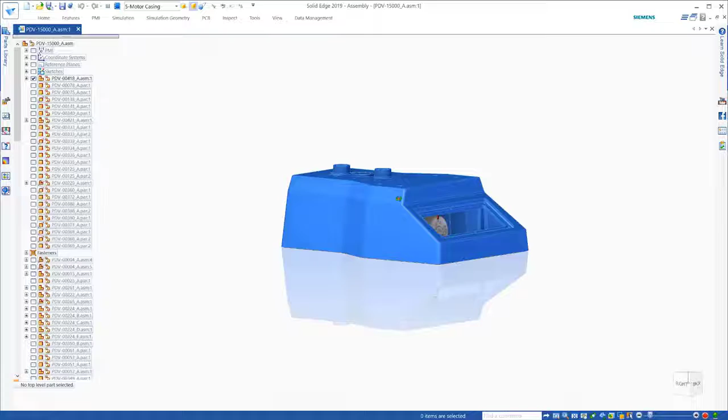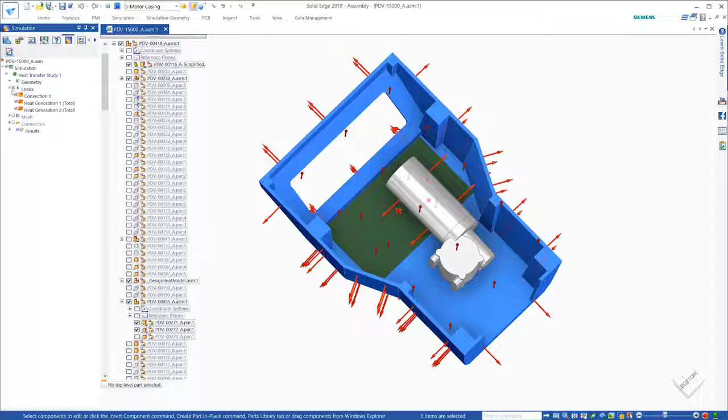Solid Edge expands its structural and flow simulation capabilities. Starting with structural simulation, in addition to static studies for stress strain, buckling, vibration, and steady-state heat transfer, users now have the ability to study the impacts of heat moving through parts with relation to time, also known as transient heat transfer. This allows designers to see temperature changes over time in order to assess things like heating and cooling performance.

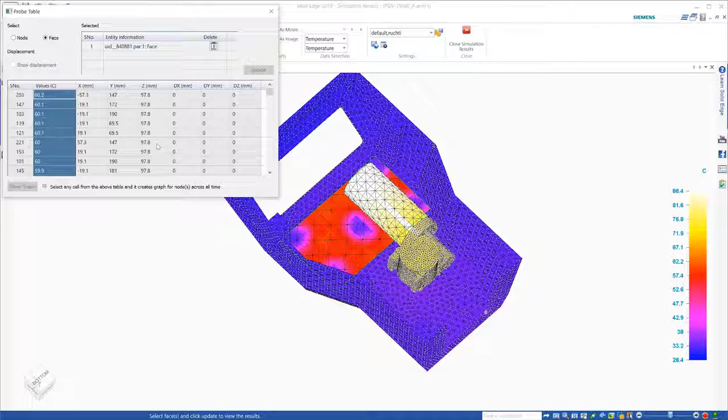In this example, we need to ensure that the heat generated from the motor doesn't overheat the printed circuit board, or PCB, located directly beneath it. A steady-state heat transfer has already been defined here, which takes into account the heat being generated by the PCB and the motor. Using the probe tool, we can query the temperature at different points on the board. Here, the new face probe option allows us to easily find the hottest regions.

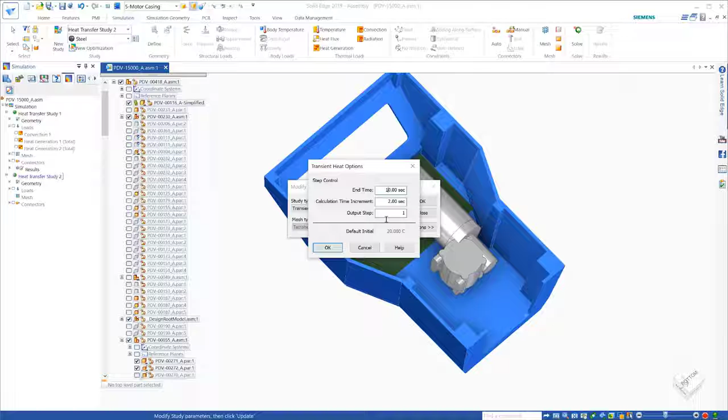What we're seeing here is the final steady-state result of heating parts until they have reached full capacity. However, for this assembly, the motor only works for a couple of minutes at a time. As such, to get a more realistic view of the heat on the PCB, we'll use transient heat transfer to accommodate for these working times. This is as easy as copying and pasting the existing study, changing the study type, and defining the working intervals. Then the study can be solved.

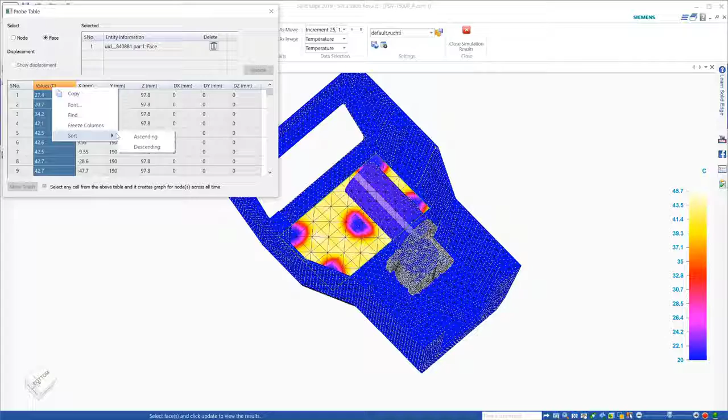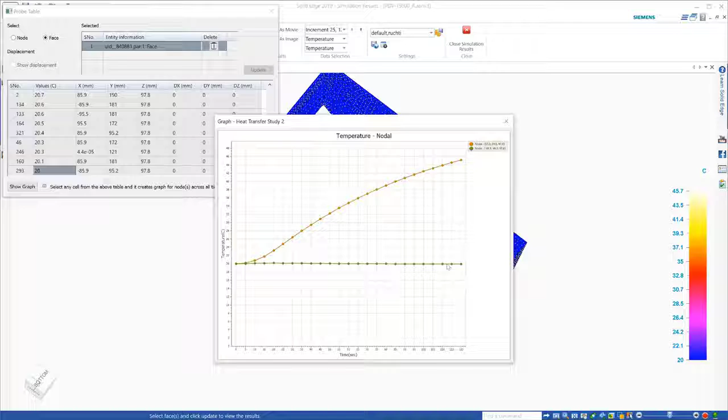Viewing the results, we can immediately see the difference in heat distribution of the assembly. As it's only working for 2 minutes, the motor doesn't have time to heat to full capacity, effectively having a negligible effect on the overall temperature of the PCB. The probe tool shows that the maximum temperature is 15 degrees cooler than the previous study. Additionally, selecting any nodes we'd like, Solid Edge provides a graph to easily visualize changes in temperature over time.

Solid Edge's transient heat transfer capability gives more precision to the user, allowing for essential visibility into heat distribution of components critical to validating your designs.

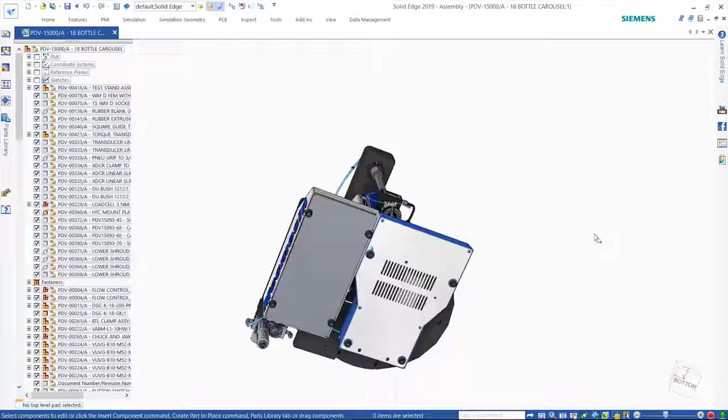Turning our attention to flow simulation with FloEFD, the EDA bridge allows the import of PCB designs for fast analysis. Again, focusing on the PCB, the electronics design for this has been completed in the Solid Edge PCB application. The PCB ODB++ information can be opened via the EDA bridge directly within the Solid Edge assembly environment, where several formats are supported. This automatically generates the board along with the components and copper traces. The thermal properties can quickly be imported in order to apply the thermal data to each individual component.

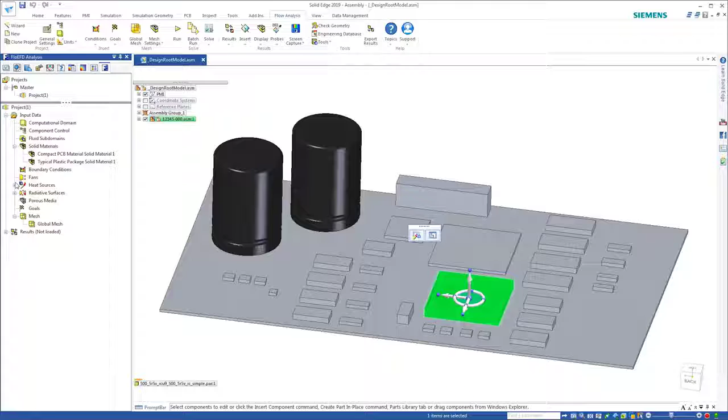The printed circuit board is transferred to FloEFD, where the simplified assembly is generated. All material properties, heat sources, and radiative definitions are automatically generated in the FloEFD project. Loading the simulation results clearly shows the temperature distributions on the board and components. Focusing on the complete design, we can see the effects on the airflow in that part of the assembly.

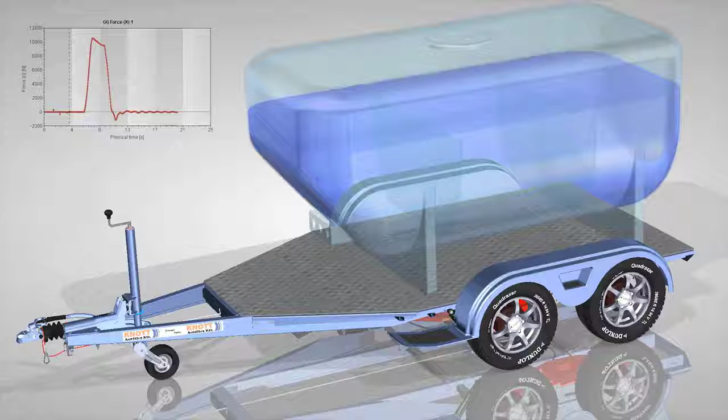Other new enhancements include the ability to analyze the behavior of fluids moving, sloshing, or pouring using free surface technology, as can be seen here when this trailer comes to an abrupt stop. Compare this behavior to a design that contains baffling in the tank to try and eliminate the excessive sloshing. Viewing the results of the two designs side by side illustrates the benefits of the baffled design.